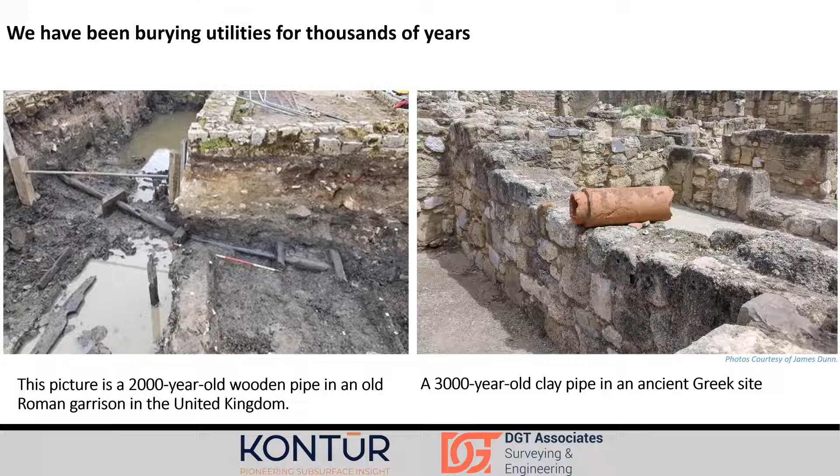So first of all, I'll give a short history of underground utilities. It's older than you think. We think about our modern cities, but ever since we've had civilization, we've had issues with utilities. So an example here from the UK and from ancient Greece. These people putting in their utilities had to think about where they were going to put them, and maybe they had to repair them and replace them at some points too. So utility mapping is a fairly ancient industry.

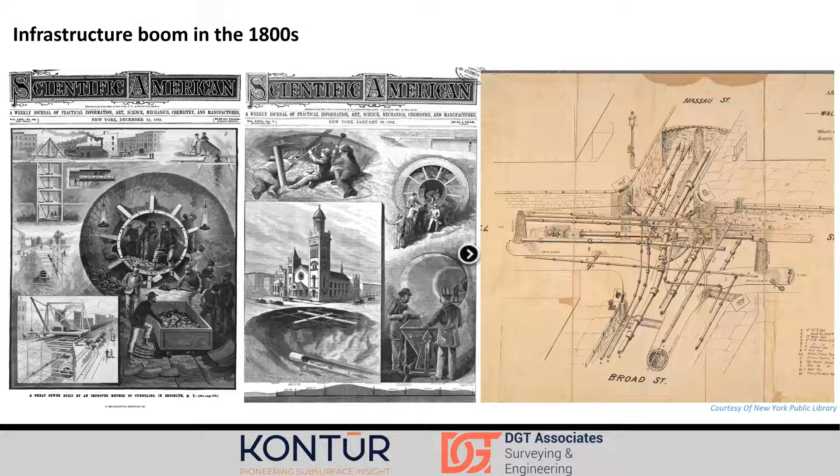From the modern perspective, there was a big boom in the 1800s. This is sort of where we can begin the trace of our current industry. And there's a lot of public interest in this too. You can see this is the cover of Scientific American in the 1800s, people thinking about how we're building our modern cities and how we're using infrastructure to make our lives better, to have utilities available to us wherever we need them.

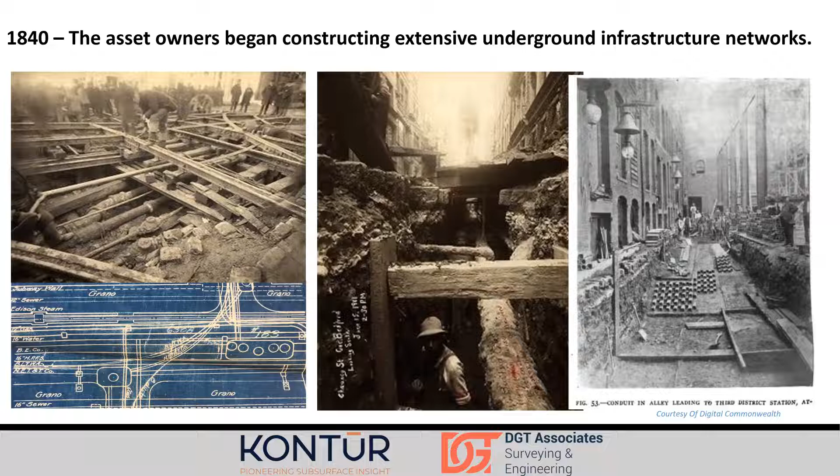So we began building these enormous infrastructure situations all over our modern cities. This issue where we have really congested streets underground, it's not just a modern issue. This is an issue that happened right off the bat. We were filling up our space, filling up our streets very quickly.

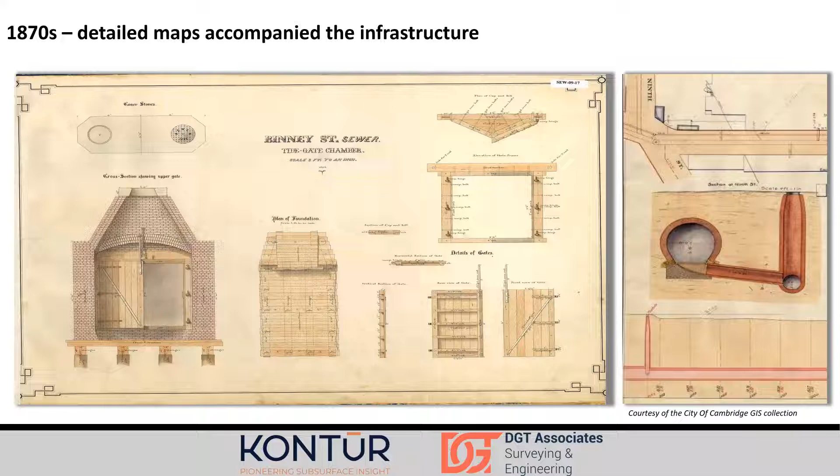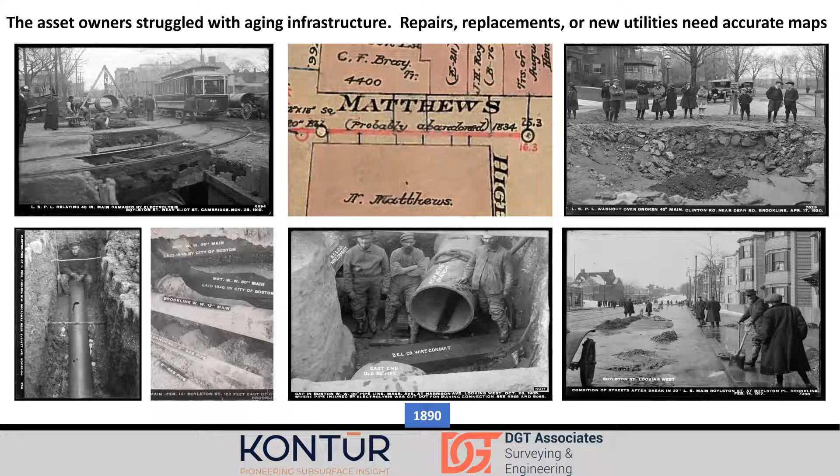Of course, the first thing that happens after you build an enormous amount of infrastructure is that it starts to age. And so we have to deal with repairs, replacements, and new utilities. So either we're going to take out the old utilities and put in new ones, or maybe we abandon them in place and put in new ones. We have to know where everything is so we can do this. So utility maps were extremely important. We need accurate maps so we know how to move forward with this.

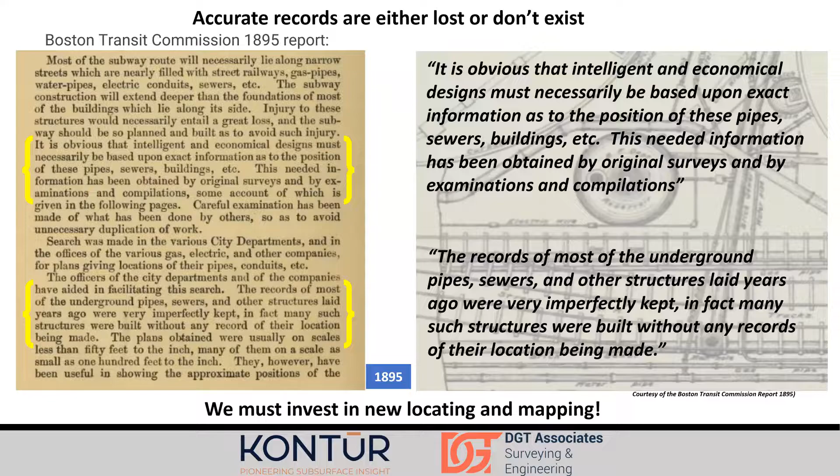This issue goes back to 1895, the Boston Transit Commission. They were thinking about, over 100 years ago, how we need accurate maps to move forward with our utility infrastructure. This is basically the beginning of 38-02 or PAS 128, from 1895. There was enough need in 1895, the problem was known. It was a big enough problem that they formed a commission to figure out how to do this. What they noticed was that accurate records, accurate maps, either didn't exist or were lost in a lot of cases, not every case, but many. So they had to reinvent the wheel over and over again. This is an old problem, and we have to invest in new locating and new mapping over and over again. That brings us to subsurface utility mapping and how we address the problem.

So not all maps are created equal. We have to be accurate. We have to strive to be as accurate as possible.

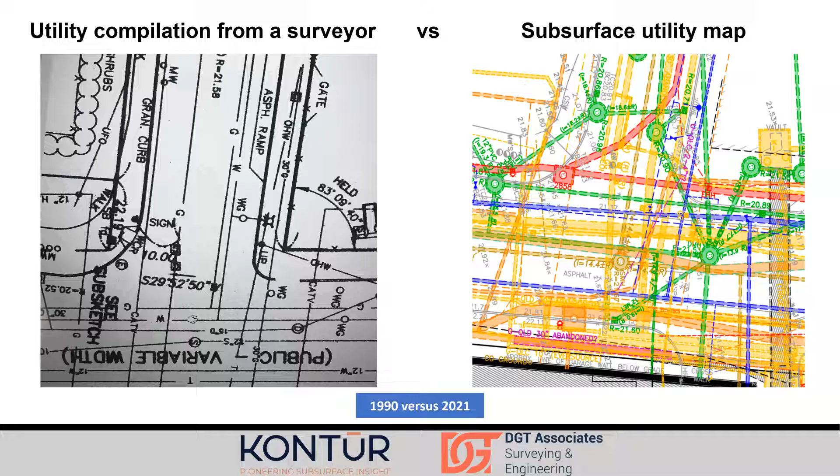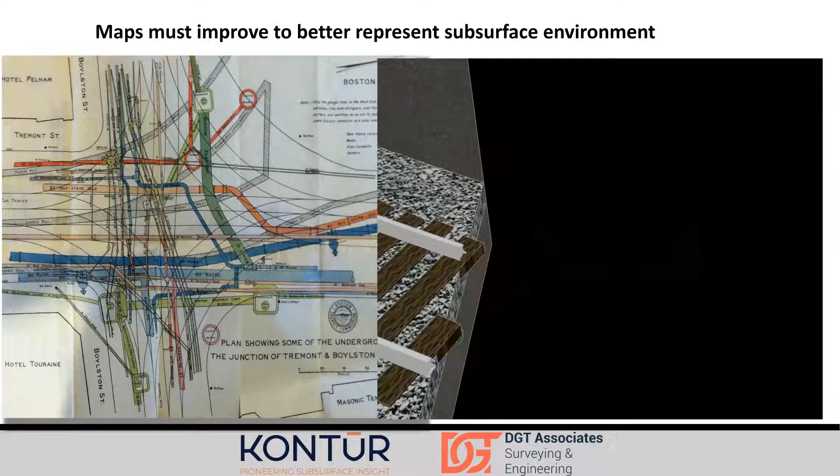We can have accurate maps either in 2D or in 3D. This is an example, let me play the video, of how we sometimes use 3D rendering to show very complex utility infrastructure in certain areas. It shows that it's not simple. Since the beginning, we've had very complicated infrastructure situations, building up on each other over the years. It's not simple, and it's not just connecting the dots.

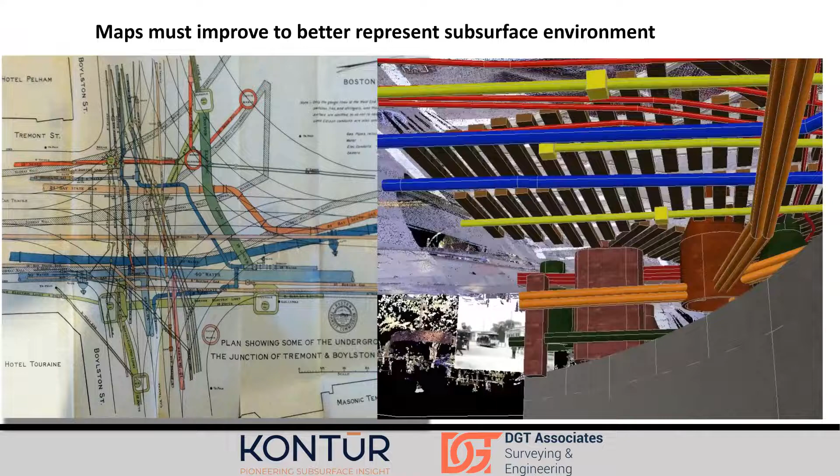And the costs are really great if we get things wrong. If we have errors and omissions, the financial cost is enormous. I'm sure anywhere you are in the world, there's been a big engineering project that's gone over cost. It's kind of surprising when they don't go over. A lot of that is because they run into things they didn't know about, having to move a gas line or something they didn't realize was there. That comes down to poor quality maps in the first place. If they knew where it was, they could have put that into their original cost estimates.

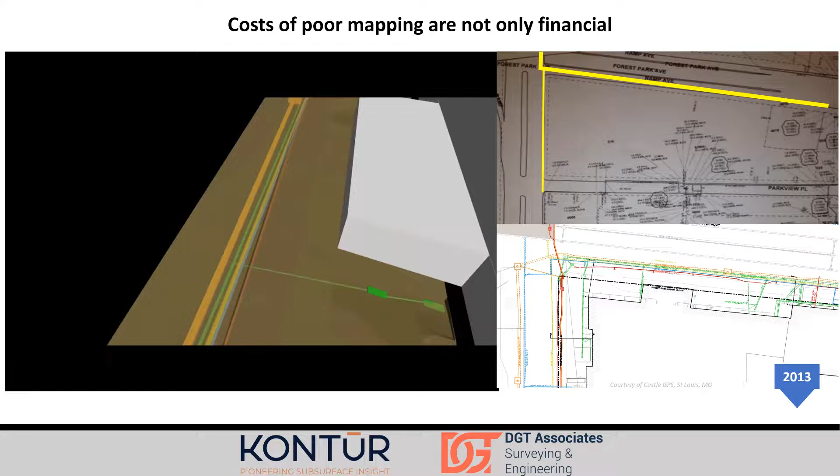But it's not just a financial cost. This is an example of a project from St. Louis, a hospital in St. Louis. What they found was a gas line right around the hospital that was actually unknown, it wasn't on the existing maps. This isn't just academic, saying well we didn't have the right maps and it's going to cost us a little more. We can't really be messing around with gas lines and risking an accidental explosion near a hospital. This is serious stuff.

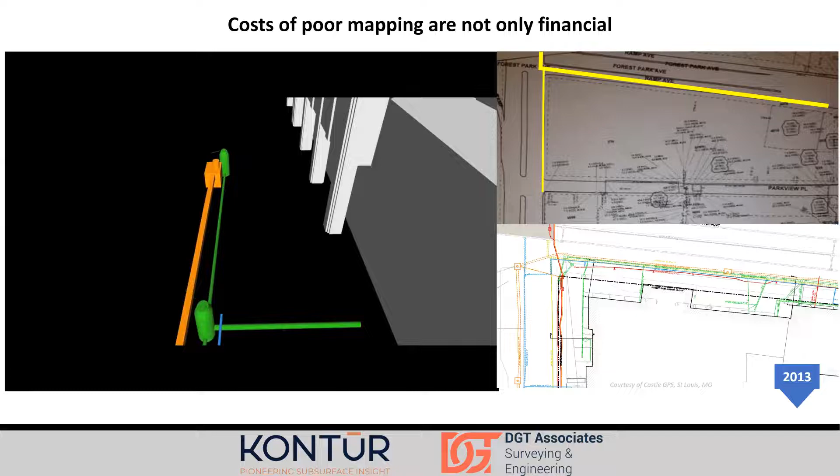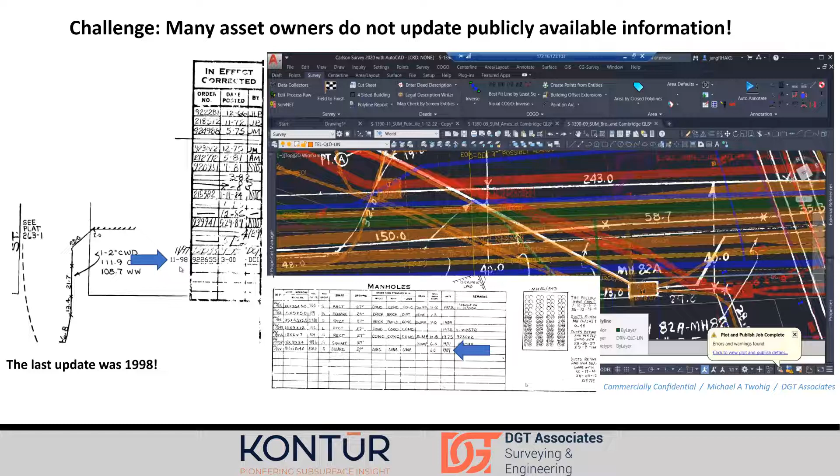So there are challenges to how we build up these maps. A major challenge is that asset owners don't actually tell us when they put in new utilities. You can see here there are updates on different manholes and things for telecom companies, and they haven't been updated since 1998 or 1987 for the manholes. There's definitely been infrastructure spending in the telecom area since 1998, enormous amounts, tons of new telecom utilities, but we don't have them on the publicly available maps. So how do we get them? They're not just handing them out, it's valuable internal information. We have to find a way to get our information somehow.

What we need is a comprehensive SUM program, subsurface utility mapping program. We have to start with the old abandoned pipes from ancient history, the 1800s, and include the new telecom utilities that aren't on any existing maps. These maps have to reflect decades and centuries of history. It's not a simple thing to do at all. This is an interesting quote from Dr.

Ray Sterling here basically saying it would be nice if we had this fantastic geophysical tool that could identify all the utilities. Unfortunately, that technology doesn't exist, but we can cobble together what does exist into a decent way to figure out a comprehensive SUM.

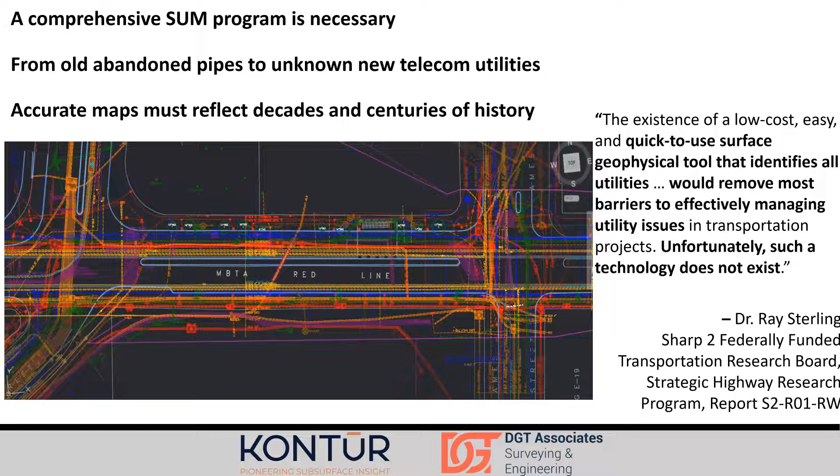The traditional way subsurface utility mapping progresses is with EM locating and GPR, like pushcart GPRs. These are frequently used and work reasonably well. The problem with handheld electromagnetic devices is they're only good for metallic pipes or things with tracer wires in them. So it's not everything. There are plenty of utilities in PVC pipes and things like that, and push carts are pretty good for those, but they have other limitations we'll get into later.

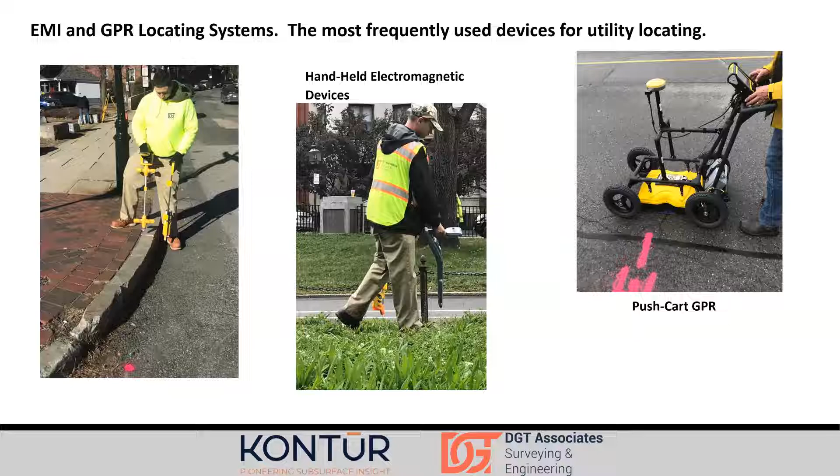So we decided there's plenty of room for innovation in SUM. The reasons: we need to cover large areas in streets, there's tons of roadway, and it's not reasonable to be walking around with a push cart everywhere. It's too much, it's not safe to have workers working in the streets and travel lanes, and it's extremely expensive and disruptive to close down roads.

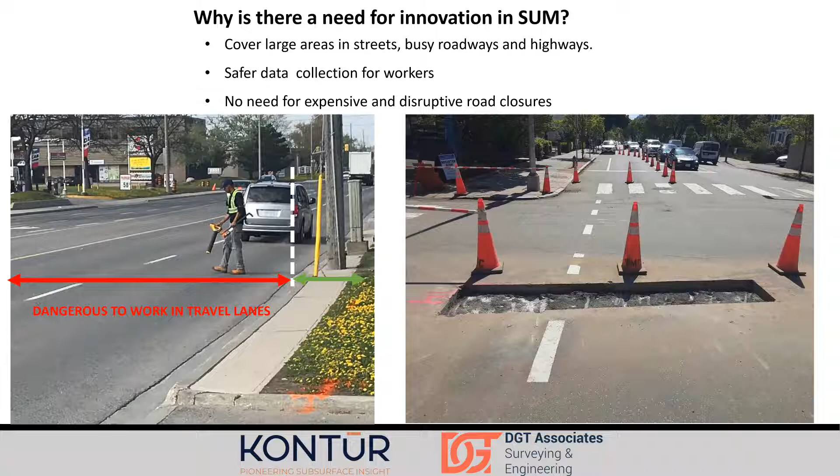On the right, you see a picture from vacuum excavation, just the other day in Cambridge, right around MIT. There's tons of traffic that has to be diverted, the lanes are closed all day, and it can be annoying if you've just repaved an entire road and we're digging a hole in it too. So anytime we can avoid those things, that's great, and there's room to do that if we innovate in SUM.

Another aspect driving innovation is that demand for SUM data is increasing. Recently in Massachusetts, all new projects shall include scope and work hour provision for completion of level B data, meaning geophysical data. So how can we best respond to this? We already know there's reason to innovate, and even with government laws coming down, there's going to be a lot of demand for new SUM data. So how can we do this?

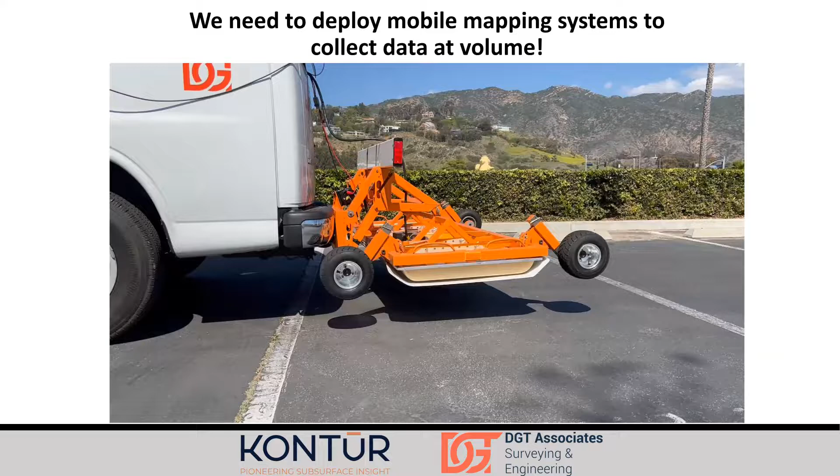What we've decided is we need to deploy mobile mapping systems to collect data at volume. This is a little video of our new Kontur system attached to the frame we've made, so we can deploy it off of our van. We can lift it up and down, and we can collect data at driving speeds. We've been able to do that, so we're going to get into that next.

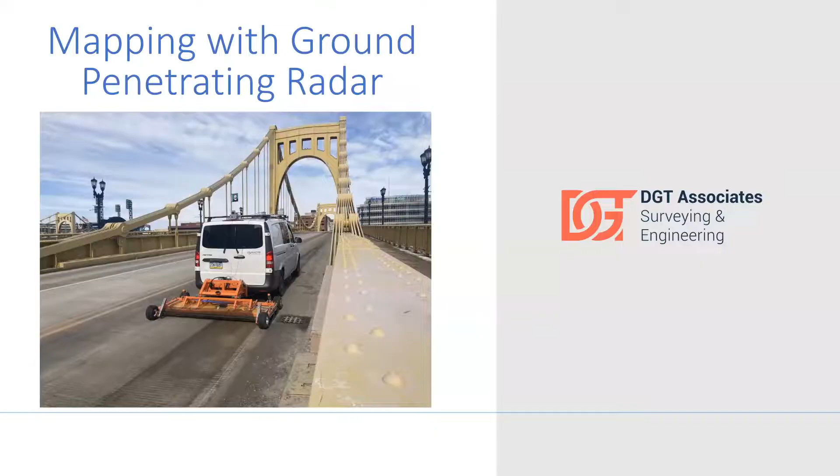This is how we map with our ground penetrating radar with our new Kontur system. I talked a bit about the pros and cons of handheld systems. The pros are the push carts are pretty good for what they do, they're versatile and accessible for anybody to pick up and run with, and they allow you to immediately identify targets if you can see them. But there are major drawbacks too. We still use these, but there are still major drawbacks. It's very slow because it's just one person walking, basically.

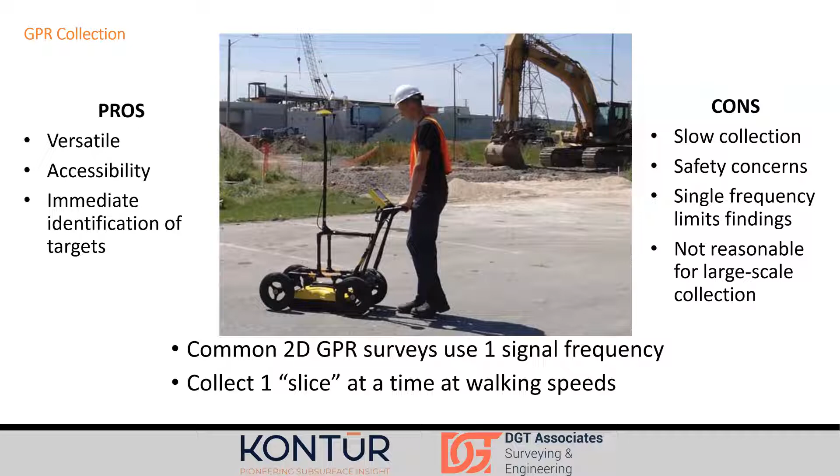There are safety concerns in the road. Usually, not always, but usually it's a single frequency, so that limits what you can see with the GPR because you're only penetrating to one single depth at a time. It's just not reasonable for large scale collection. If you're trying to respond to the directive that we need level B data for everything now, it's not reasonable to rely just on these. So we're only getting one slice at a time.

To compare the speed of data collection, this is a back of the envelope calculation, but taking into account that our Kontur has 24 channels compared to a pushcart, which is one single channel, in one day we can collect the equivalent of what it would cost one person 10 days to walk at 3 miles an hour, versus us collecting at 10 miles an hour driving speed. We can actually drive a lot faster, but I did this conservatively, bumping the collection quality parameters up almost to max quality.

This is a really conservative estimate, but it would take at least 10 days for a person with a push cart to get the same amount of data, and it still wouldn't be the same since that's just a single frequency. We consider multi-frequency broadband systems to be extremely important, and that's one thing Kontur was able to provide really effectively for us.

The high frequencies resolve things near the surface. I like this example - not that you'd need a GPR to tell you this, but it's accurate enough, with fine enough detail, that we can detect the paint on the roadway showing where the left turn lane is. There are easier ways to tell where a left turn lane is, but it's just an example to show how accurate it is. On the right, the low frequencies show depth.

This is a pipe that we're able to trace, and you can see in the cross section at 7 to 8 feet, or starting at 8 going up to about 5.5 feet. It's a pretty deep utility for the soil we have in Boston to be able to find this. So we can see both at the same time without having to use multiple push carts or multiple frequencies.

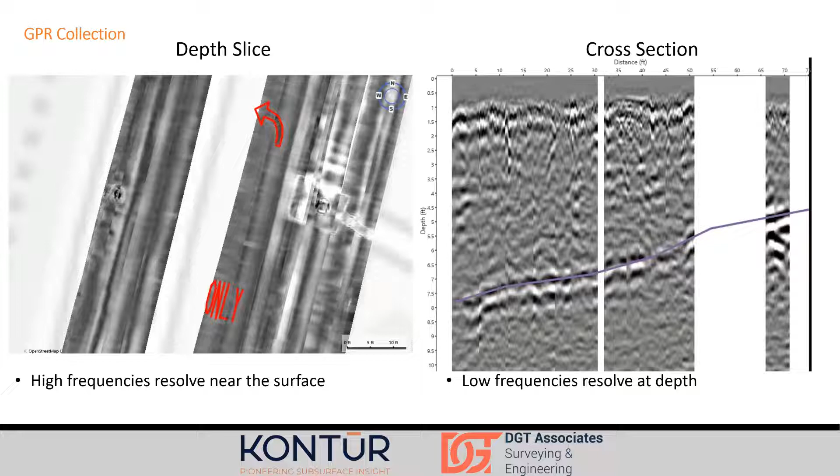So just to underline the point one more time, with a single push cart we're getting slices of data, like slices of bread. The analogy I have in my head is that a broadband system collecting 24 slices at a time isn't just getting way more slices, you're also getting different types of bread, like rye and sourdough all at the same time - it's a whole bakery.

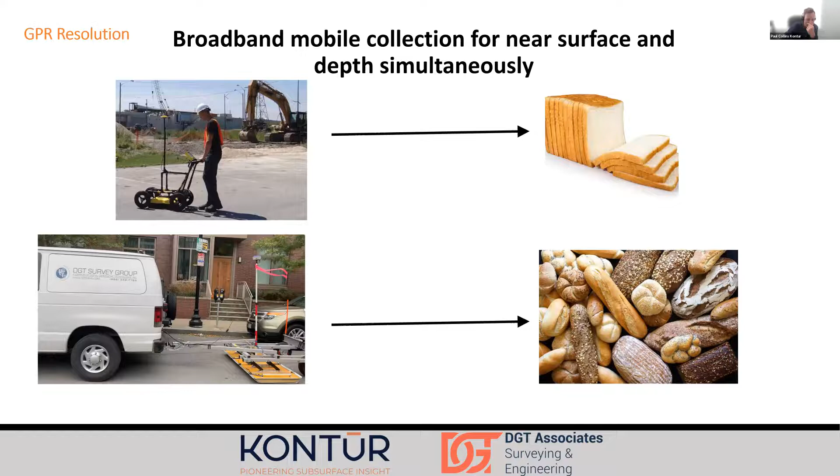I have a question for you from Mark - hey Mark, by the way - it's about the 10 miles. Is it lane miles, or full carriageway, or 10 miles of collection per day? Yeah, so that would be lane miles.

And I made that 240 miles of GPR data because it's 24 channels at a time. So I'm comparing a push cart where you're getting one slice, versus really getting 24 slices at a time. That's the comparison I'm making.

And this is a 3-dimensional volume that you collect in your driving direction. It's 24 channels separated by about 7 centimeters, so it's effectively a 3D volume. The way I like to set the trigger spacing is similar to the separation between the channels, so it's sort of a huge 3D grid, and you get a 3D volume of data, which you don't get if you're just doing a slice. I know there are software systems that can turn slices into an effective cube, but it's not happening simultaneously, and that cuts back on the advantage of identifying things immediately. You can't if you have to go back to the office and make a huge cube of data that took you 10 days to collect.

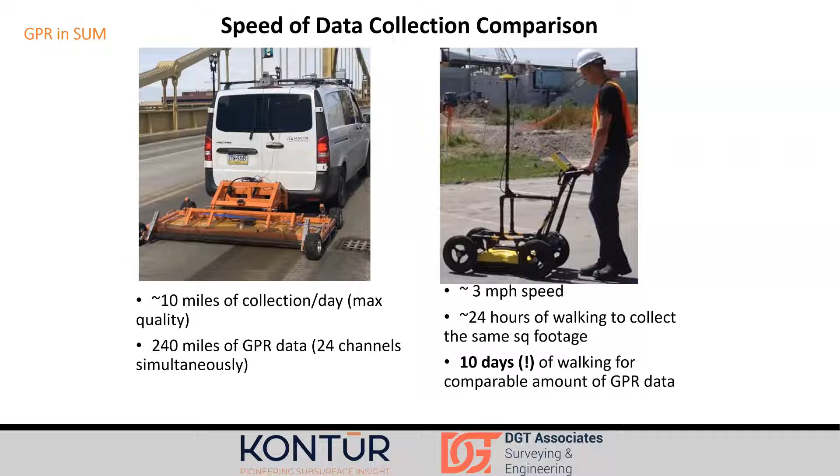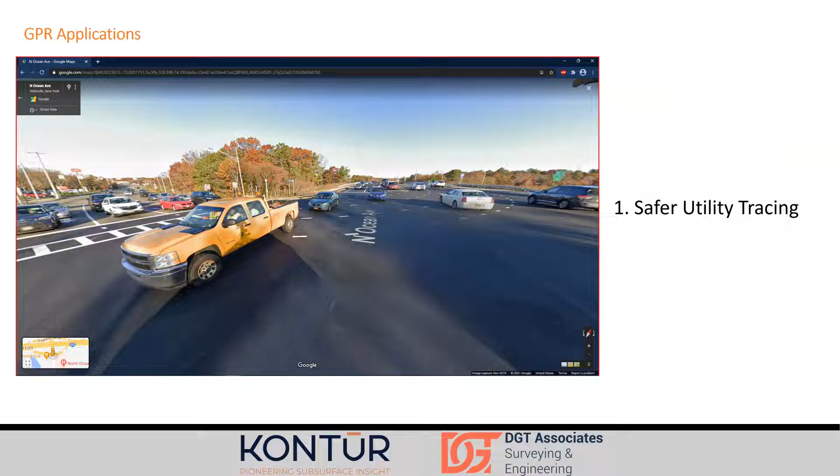I'll talk next about the value of GPR in SUM, or the value we think we're adding. The first major thing is that it's safer for utility tracing. This is a Google Street View image from a project we did in New York State - this intersection is something we collected with GPR. It's like 10 lanes wide, you don't want to be in this intersection. You just can't do it with a push cart or an EM locator, so you either have to shut it down, which is extremely disruptive, or you're just not going to get data there. So it's obviously safer and more effective.

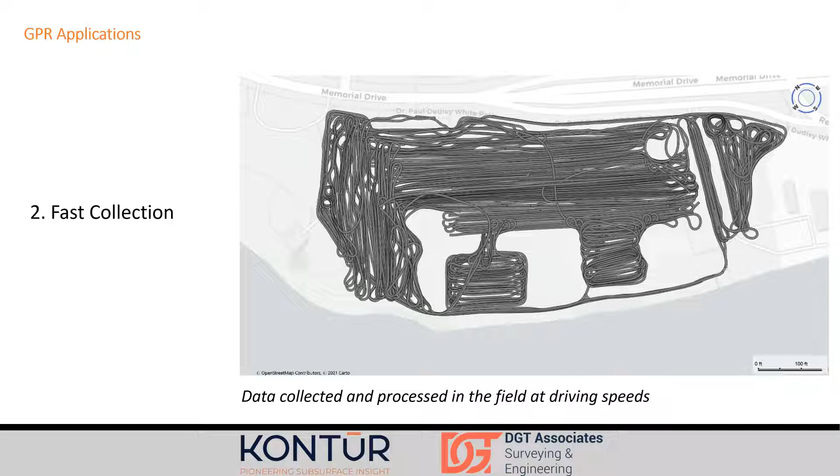So confirming locations is really effective for us. It's not just about finding things that nobody knows where they are. It's also about confirming the locations on our maps with another method. We have these legacy maps, and we want to see if the GPR actually agrees with them.

One thing we do a lot is, even if we don't find the pipe, maybe it's too deep or GPR doesn't find everything, we can at least find the trenches. We often find them because they're infilled with soil that's a little more or less compacted than the surrounding soil. So we can trace these things, and nobody's digging in these streets for exercise—there's a reason for every trench. So even if we don't know exactly where the pipe is in terms of depth, we know where it is in plan view because we can trace the trenches.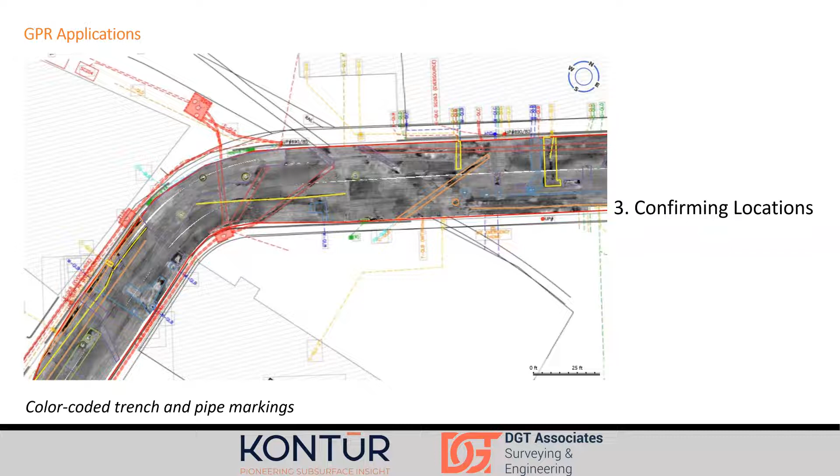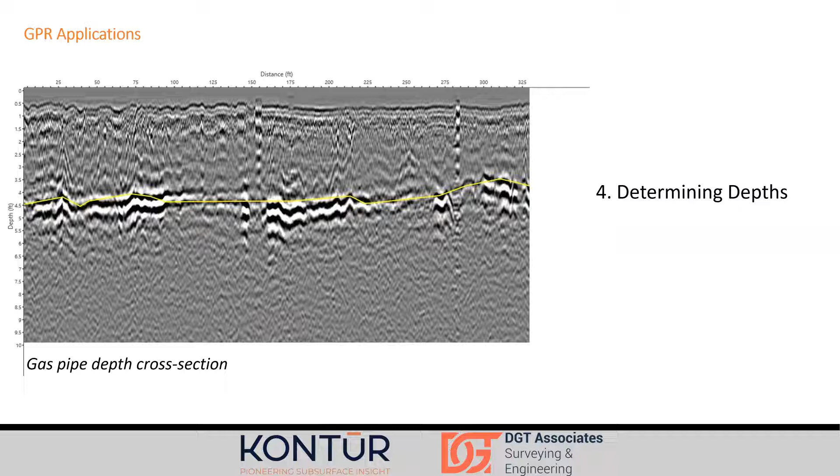Determining depths is an important thing. This is something EM locators really struggle with when I've used them. They're pretty good if you can find the pipe, and they can trace it in a direction, but you're never going to get the depth, or not confidently anyway. Here's an example of a gas pipe we were able to trace very consistently at about 4.5.

Finding unknown features—this is my favorite thing we do with the GPR. This is an example of what we talked about before, where asset owners don't always tell people where their new utilities are. This is also extremely true for universities. This is around the MIT area, and MIT, like most universities, will have their own utilities they don't tell everybody else about. We didn't have this on any existing map, and weren't able to find it with utility locating devices.

But with the GPR, we went up and down the street and found this extremely provocative double pipe system with a 90-degree kink in the middle of the street. This is probably right on top of a steam tunnel. We had an inkling there was something there, but we didn't know it was going to look like this. That's something the GPR really adds for us.

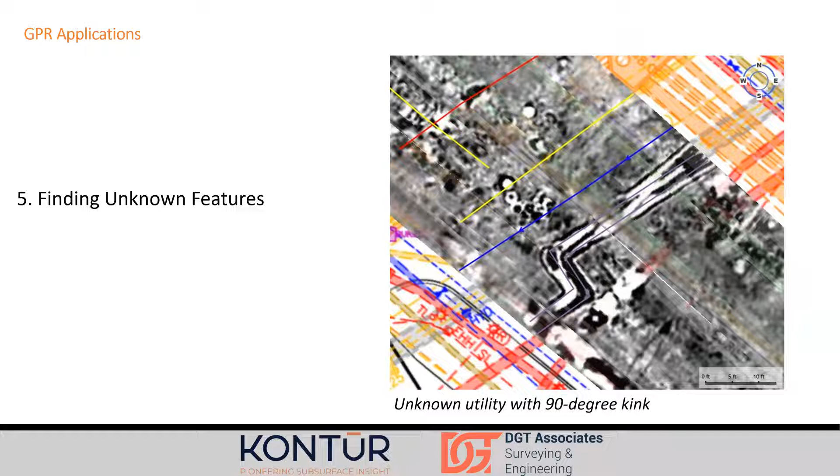So how do we integrate the GPR into our traditional maps? We had bread before, so I'll introduce cheese—this is the way I like to think about it anyway. Swiss cheese: every slice has holes in it, which are the weaknesses of the method. What we do is layer all the different slices together in ways that the weaknesses augment each other, so that at the end we get a nice solid block, or as close to a solid block as we can.

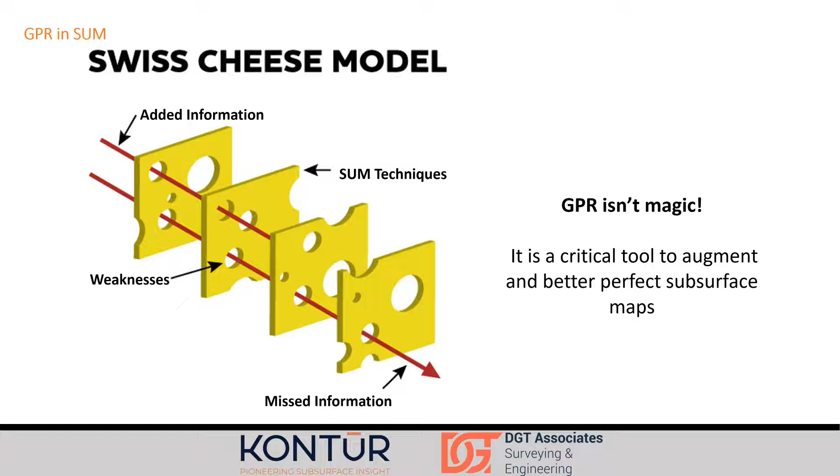You're never going to be perfect, right? And GPR isn't magic—we're never going to find everything with it, but we augment our existing methods with GPR, and we're getting something closer to reality than we ever were before.

So we start with our legacy and existing maps. DGT has a real wealth of really old and legacy maps that helps us a lot—that's always the base layer we start with. And we assign quality levels to everything, because just because it's on an old map doesn't mean we necessarily know it's there, but we at least have an inkling that something might be there.

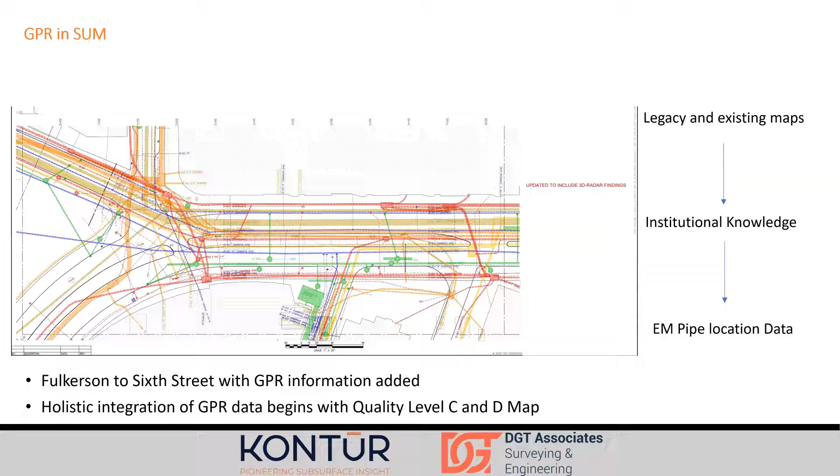We add institutional knowledge, from people who've been working in these streets for years and decades. We add the EM pipe location data, and then on top of that we augment everything with the GPR, so we can holistically integrate it into everything else to get a better map.

So we correlate the GPR to existing utilities. All these colors here—red would be electric, blue is water. You can see some pipes coming through as the depth slices go, and we're able to say, okay, that's our water pipe, and now we have a decent idea of the depth.

But the purple is something that we didn't know. This diagonal pipe going across the street here, that's something we had no idea of. It's an unknown feature that can now be incorporated into future maps and deliverables, and maybe one day we'll dig a hole there and figure out what's actually going on.

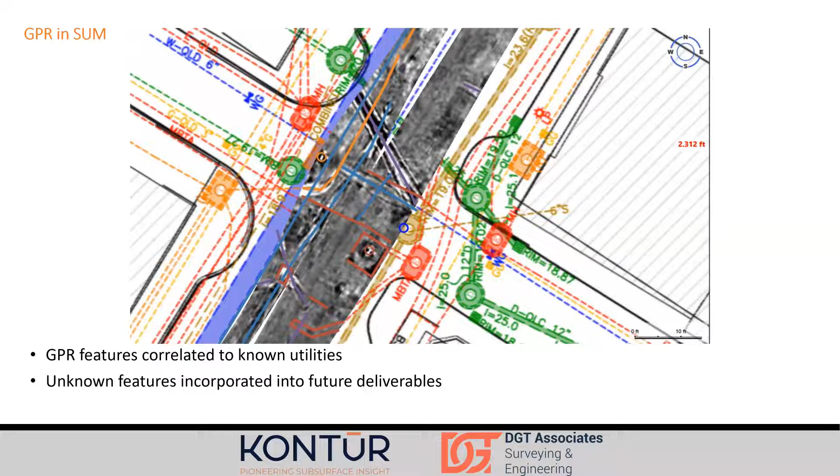This depth slice movie, I kind of like it because it reminds me of archaeology. You'll see in the middle some pipes come into view, including one that rises over the pipe going up and down the street, and then dives under the diagonal one over by the manhole. You can almost put yourself in the mind of the engineers who had to decide: okay, where's this pipe going to go—over this one, under this one.

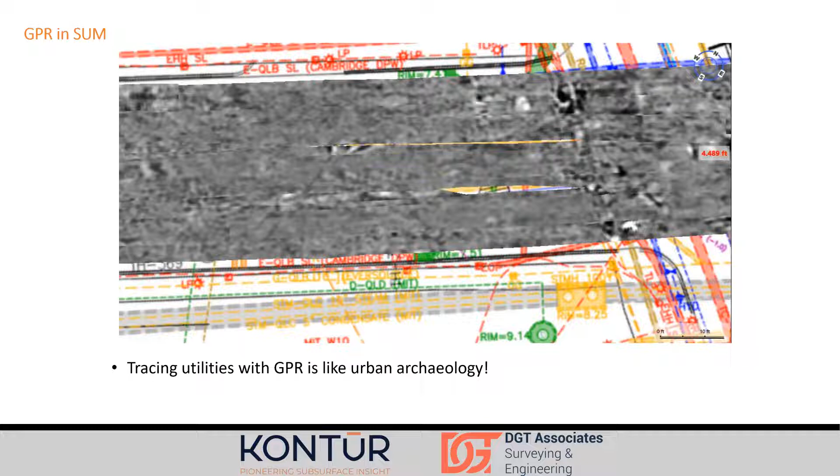We can tell that some are older and some are newer. You can kind of figure out when these would have been installed, or at least their relative age, and that can even help identify which ones they are if you didn't already know.

In collaboration with traditional locating techniques, we use GPR. Remember that map I showed you before where it was just direct, just connecting the dots? Well, accurate width really matters.

This movie really underscores that point. This is a telecom situation, I think it's fiber optic, so it would be new - maybe we didn't know about it beforehand. But you can see how wide this is. It's not just connecting the dot to the dot to the dot. You have to know how wide this is, because it's like 3 or 4 feet wide, and something you really wouldn't want to hit.

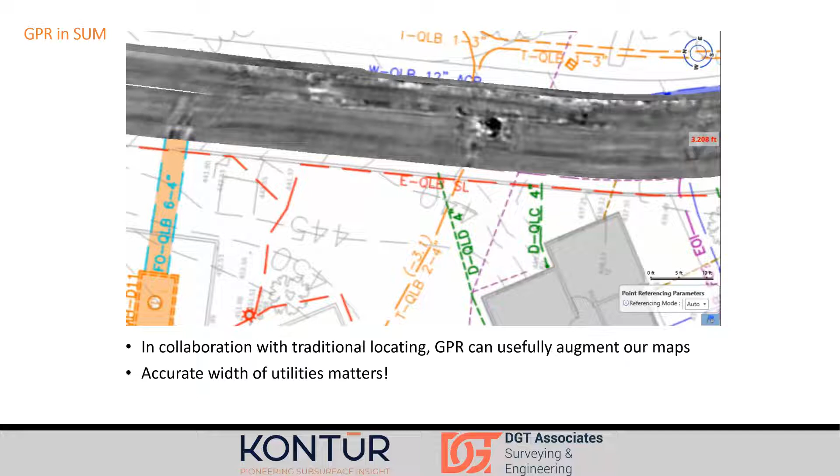The people whose utility this was - if you had hit it and disrupted their entire internet, they would have been pretty frustrated with you. So you've got to know where the edge of this thing is. It's not enough just to draw a line down the street.

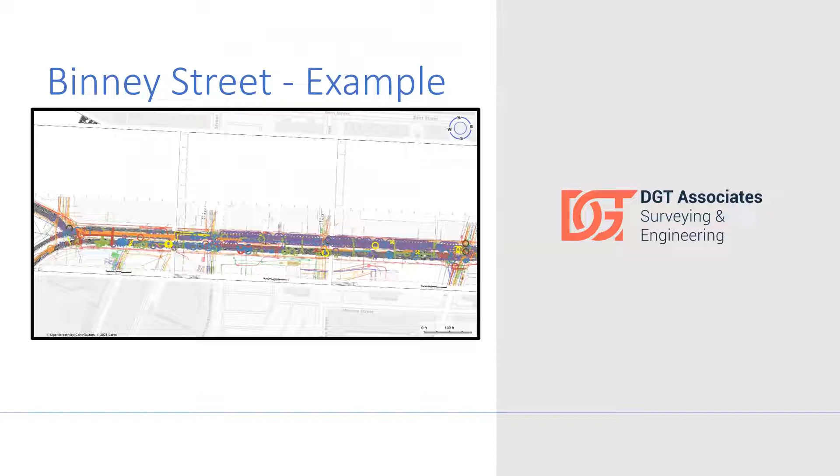So I'm going to give an example of how we mapped this street called Binney Street in Cambridge, just north of the MIT area, and how we integrated GPR into this. We recorded it with our Kontur system. After filtering, we used signals from 200 to 1200 megahertz, so the resolution near the surface and at depth was one I was happy with.

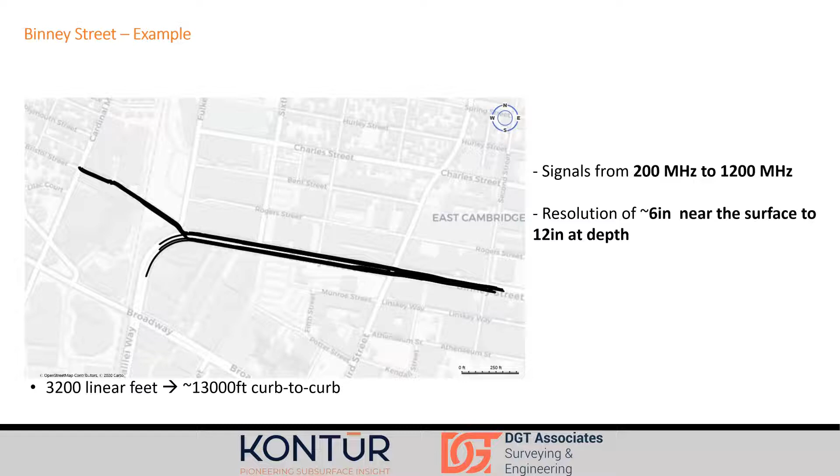In total, we had 600 features identified with the GPR. 10 feet was the deepest item, and right at the surface, 0.2 feet was the shallowest thing we were able to see. 200 of these 600 were totally unknown - unknown in the existing maps and not found with traditional utility locating techniques.

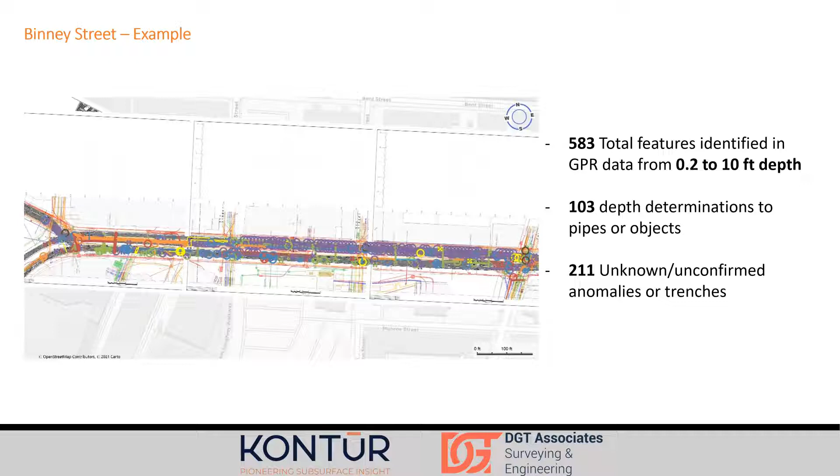Here's an example: we have an unmarked drain system. We know it's a drain system because we have a catch basin at the surface, but we didn't have this drain, didn't have its depth, and didn't see it diving. So we have an unmarked drain going across the street, marked in purple.

And we're able to tell - it's better to be able to tell how the depth changes with the drain pipe going out to the left here from the catch basin, rather than just drawing a line between the two items. We're able to see pretty accurately where the top of it is.

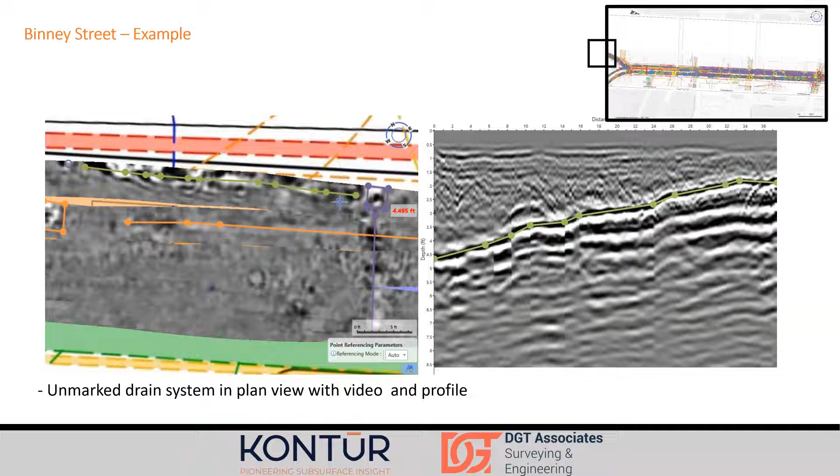This is a pretty good example of how GPR alone wouldn't be enough for our purposes. With the drain pipe, you can draw that with the GPR pretty well. But this extent of the detention system is not something I necessarily would have picked if we didn't know the way these buildings in this area were being built.

We were aware from legacy information and institutional knowledge that detention systems like this exist around, and we were expecting to find it. Using that knowledge, we can bring it to the data interpretation side and say, okay, now I think I can trace it with the GPR because I know what I'm looking for. Whereas if you just gave me this data blind, I'd definitely be able to pick out the drain pipe going across the street, but I really wouldn't have any idea about the detention system. Because we have this information, a more holistic technique, we can really improve these maps.

Yeah, that's a good point. You do need to have - you're absolutely right. From the absolute beginning of your presentation, it's all about pulling together all of the sources and multiple detection techniques, everything you can collect, and then pull together, right? I suppose sometimes you'll get clients that won't give you that information because they want to test if you can find it out for yourself - not really the best approach. It's nice to have as much as possible so you can really bring the project alive.

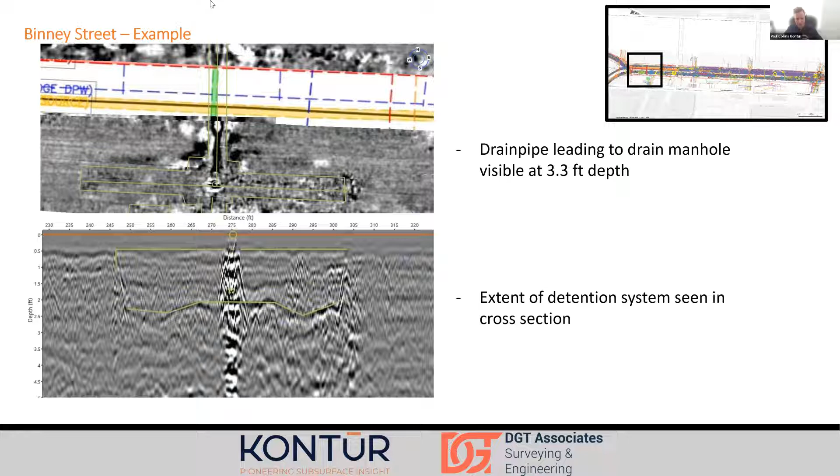So, all right, yeah, that's right. Actually, that's true. We've been able to - well, I'll talk about it at the end. We'll talk about the location. Let's not ruin the surprise, if there is one.

So we actually see a lot of metallic plates in the street around Cambridge and Boston. Sometimes they're at the surface when they're repairing, you'll see metal plates, but sometimes they bury them too. This is an example where we didn't see the steam line, but we were able to see the trench, and we were able to see these shallow metal plates at only about 0.3 feet deep. That tells you the steam line is probably shallower than you think, because these metal plates are there probably to protect it. Really simple thing to find with a GPR, but kind of satisfying.

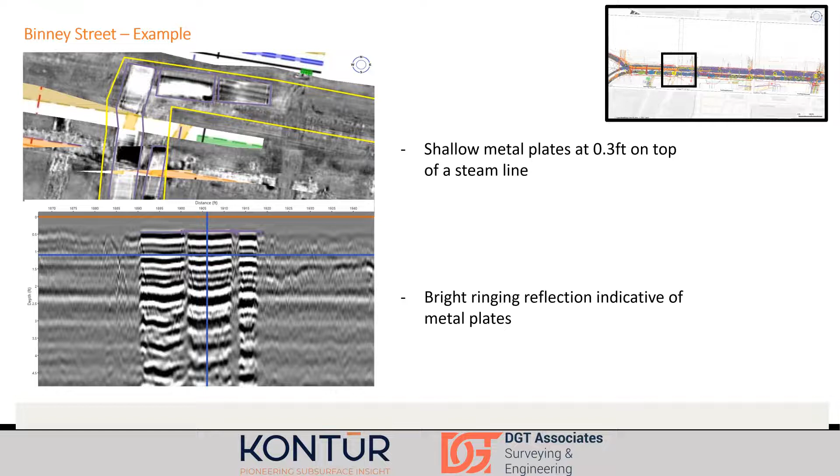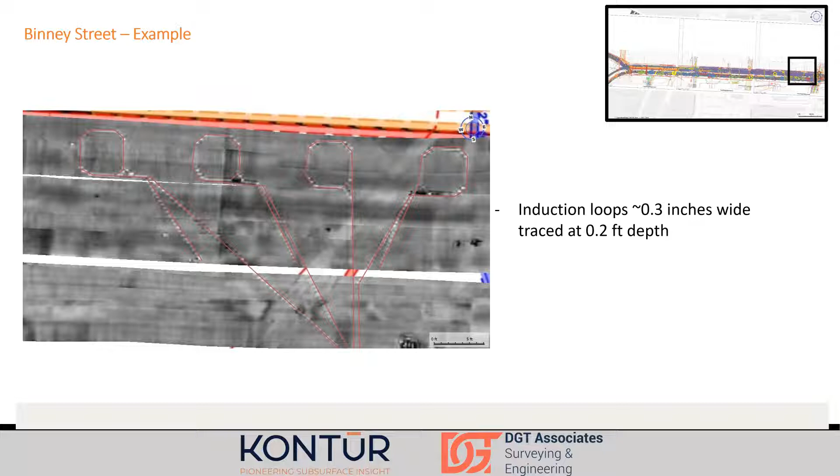So that's something certainly useful to know about. This tells you that even though we'd been using a low pass filter in the street, we're still able to see these and trace them very accurately. It's pretty shallow, so I was kind of impressed with that.

This is the last example from Binney Street that I'll give, and it's the example that ties everything together. What we found when collecting on the northern lanes of Binney Street was a series of regularly spaced pits, or rectangular features, exactly 12 feet apart. They were really similar in character, size, and depth. If you looked at them in cross section, they were really similar. So they're related for sure, but we weren't sure why. We didn't see any utilities or anything associated with them either.

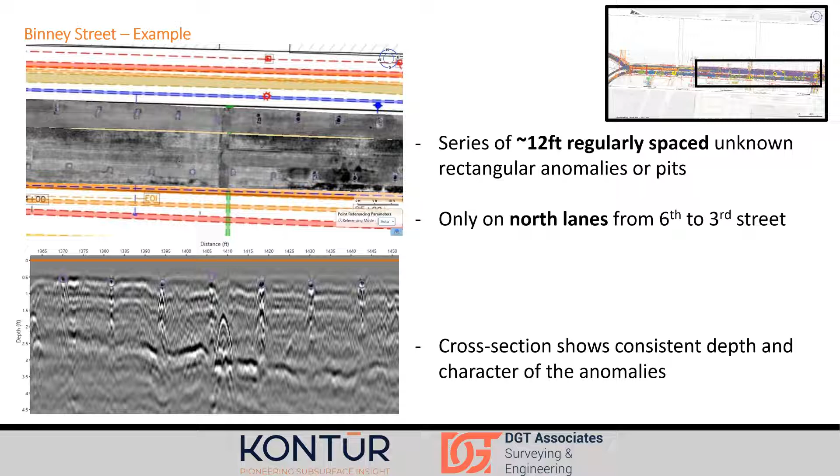So what are we looking for? It was kind of a mystery. But using our existing maps and quality level C and D data, this legacy map data, these lined up really well with where we suspected there were some abandoned gas lines. Because we have institutional knowledge about how these gas lines were installed and repaired, now we know they were repaired.

Whenever you had to repair these gas lines, you'd make a pit every 12 feet, go down, fix the joint, rather than digging up the entire pipe. So now we know the abandoned gas line is still there, and we know the location of all the joints. If it wasn't still there, you'd see one long trench instead of just the pits, because they'd have to bring it up. But without all the techniques, without the institutional maps, without the old knowledge, the holistic view of the SUE, and the GPR on top of that, we would never be able to confirm this.

So now we know there's this pipe there, and it's valuable real estate. If you wanted to build a new pipe, now you know there's an abandoned pipe right there, because you know where the repair pits are. So dig it up, remove it, put your pipe there. It seems like a no-brainer.

Yeah, so that's some of the value. You could maybe insert your pipe through the previous one or whatever. You could really save. It's real estate in a very valuable part of the world that would be available for you if you wanted to use it.

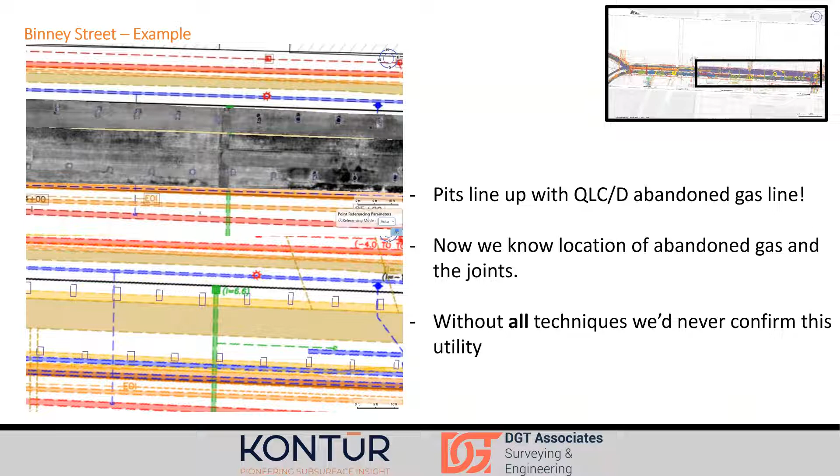And then the final calibration of GPR is, of course, actually digging things up, and this need will never go away, because no matter how much GPR you do, you always still need to confirm things now and then. So this is an example of vacuum excavation, which is the typical way we do this. It's non-destructive, and we can uncover these utilities to get the accurate depth.

The way we interpret GPR is you do your hyperbola fitting to get a decent estimate of depth, but it's not perfect. It's always an estimate, and it changes throughout the street. But once you get one true depth at one place in the street, you can calibrate your data throughout the entire collection. It really helps to have more confidence in the depth estimates if you get one good reading.

And this is the next level. So we start at level D, then move through the levels to level C. Level B is actual geophysics. Level A is where we're actually looking at the pipe, getting survey grade accuracy, the real true depth below the surface.

So now we can say, okay, this pipe at 3.5 feet is what we're looking at on the cross section, but maybe it was only 3.3 or maybe 3 when we uncovered it. Then I can adjust the way we process the data so the points we know are accounted for, and that propagates through all the rest of the data.

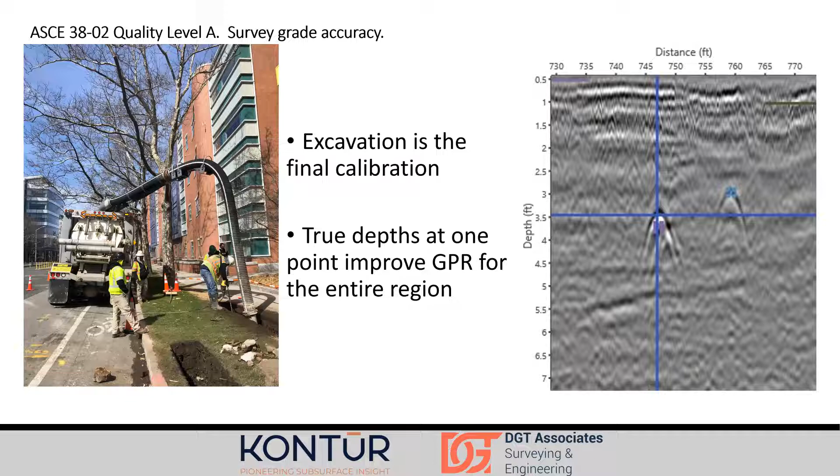So this is the thing I was mentioning, this is kind of the end of the presentation. We're talking about how we're moving forward with GPS locating in urban canyons. We've had a few problems in certain areas of Cambridge where the GPS just isn't good enough.

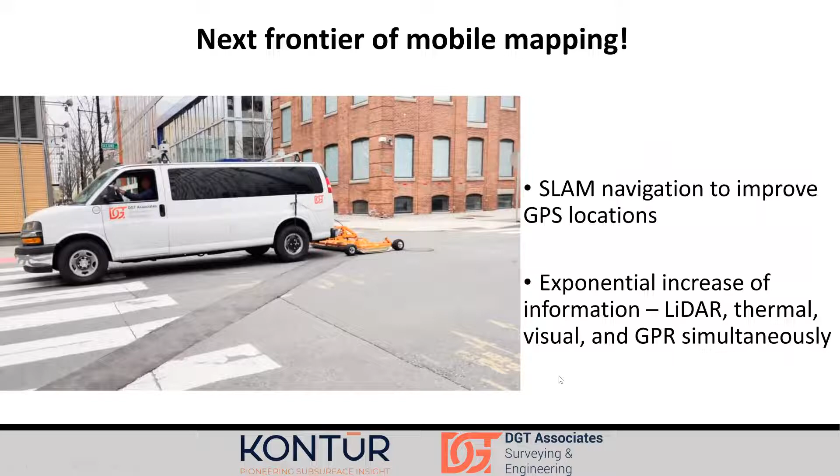So the way to combat that is to either use a total station, but that's kind of slow, or what we're working on now is integrating a SLAM solution to our GPS navigation. So what we're trying to do is not just map the underground with the GPR, but also map above ground using LiDAR, thermal, and visual all simultaneously.

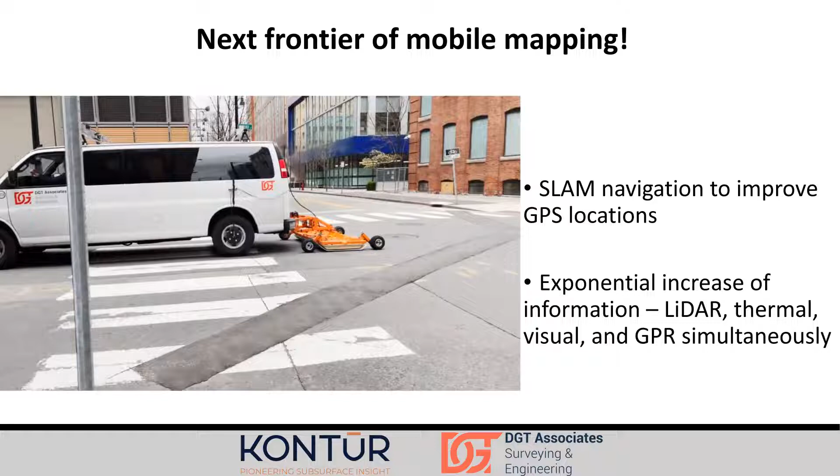We've been working with a company to develop this, and we've got our above ground mapping and our underground mapping integrated together. The above ground mapping includes a SLAM navigation solution to provide corrections to the GPS, so even when we have a really poor GPS fix, we can still locate that data later in the office. That's something Examiner and Kontur allows us to do, because you can upload your own navigation file later, as long as it has the right timestamps from a typical NMEA stream. Then you can upload it later, and we've tested this a few times and it works perfectly.

So we can upload it later, and even here when we're collecting data, in this video we had no GPS at all. It was totally off, but we were able to upload our fixes later, and it locates pretty accurately right in the middle of the street, or right where we need it. So that's the thing we're looking forward to next.

This is becoming more and more common, this need to collect above-ground information while you're moving, and then take a post-processed trajectory from something else that has better accuracy, just because it can visualize or see something and fix points as it's moving, and therefore back-calculate the positioning.

Yeah, and really, you're right. As soon as there's a timestamp available, our system can link to it, so we are very, very flexible in this way. That's really nice that you're moving in this direction, because I think it's a great thing to do, as it frees you up. It means the total station isn't keeping you bound to a certain range.

Yes, exactly. The total station, even if it's working perfectly, is a relatively slow system because you need more people, a whole survey crew. This is a much better solution. This will also help us even when we have some GPS but it's just not a perfect fix - we'll be able to get later corrections that improve the fit.